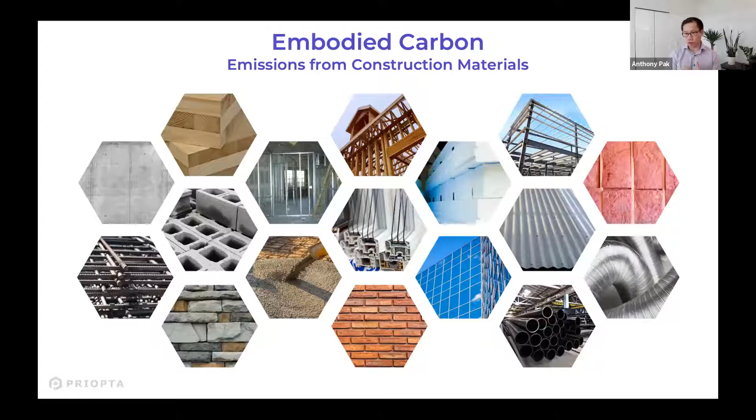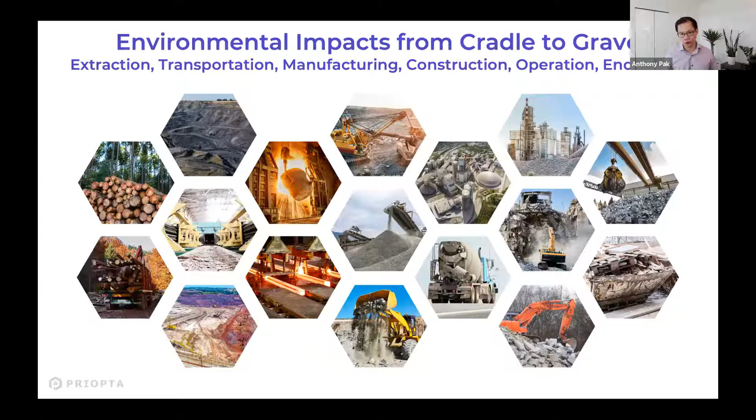So first off, why does embodied carbon matter? When we're talking about embodied carbon, we're referring to the emissions associated with construction materials. Think of all the materials that go into a building - concrete, steel, wood, glass. There's carbon emissions associated with that throughout all the life cycle stages - everything from extracting those resources, like mining and harvesting timber, to transportation of those materials, manufacturing and processing, all the way to construction, operation, and end of life. So if you think about the supply chain of all these materials throughout the whole lifespan of the materials and the building, what are the emissions associated with all those pieces? That's what we quantify using life cycle assessments.

Now, how significant is embodied carbon globally? This pie chart shows the global annual CO2 emissions. Currently, about 28% of global CO2 emissions is attributed to operational carbon - that's operating all the buildings on the planet right now, heating, cooling, operation. That's obviously a big chunk, and that's where we've historically had a lot of focus in the green building sector. However, there's a further 11% slice attributed to embodied carbon - that's associated with all the materials and all the new construction taking place each year, including major renovations.

Another way of slicing this up is looking at just some key materials used in our buildings - concrete, steel, and aluminum. Together they account for almost 23% of global CO2 emissions. Now, obviously the building sector doesn't use all the concrete, steel, and aluminum in the world - these materials are also used in infrastructure, in manufacturing cars or other products. But the reason I'm pointing this out is that as a building sector, we have the opportunity to transform some of these supply chains to create demand for low carbon concrete, low carbon steel, low carbon aluminum, and other materials. If those changes happen in the supply chain, it doesn't just affect the building sector - it can have a broader impact on infrastructure or other categories that use these materials. So we can have a big impact with our design decisions.

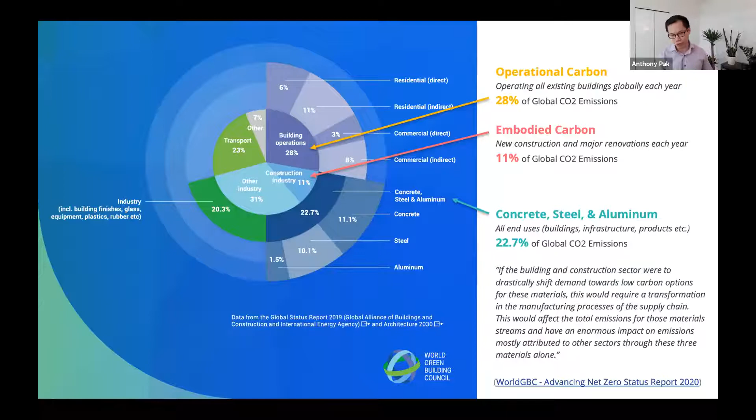What about new construction? If we look at how much new construction is projected to take place between now and 2050, over the next 30 years, and just look at that cohort of buildings built between now and 2050, the embodied carbon associated with that building stock accounts for almost half of the total new construction emissions, with the other half being operational carbon emissions. This is quite significant - half of the emissions of all new construction over the next 30 years is coming from embodied carbon, which we have typically ignored on projects. We don't even quantify it, calculate it, or try to reduce it.

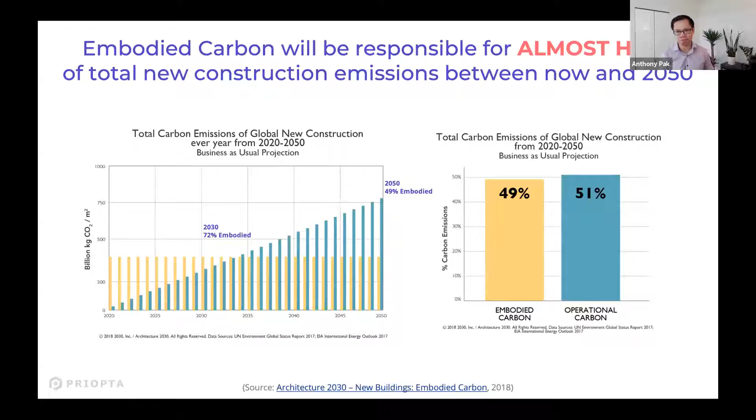That's equivalent to building an entire New York City every month for the next 40 years. Just let that sink in. Think about how much floor area there is in all the buildings in New York City - that's across all 5 boroughs, not just Manhattan. I think it's something like 5.8 billion square feet. That's how much we're building every month for 40 years. So that's a lot of buildings, that's a lot of materials.

Now, how does this map to our climate goals? To limit global warming to 1.5 degrees Celsius, according to the IPCC report, we needed to peak global emissions last year, which we actually did, in large part due to the COVID pandemic. Then we need to halve global emissions by 2030, and then get to 0 by 2050, and then go negative afterwards. So you probably heard recently Biden announced a 50% reduction target by 2030 - that's in line with this 1.5 degree scenario target.

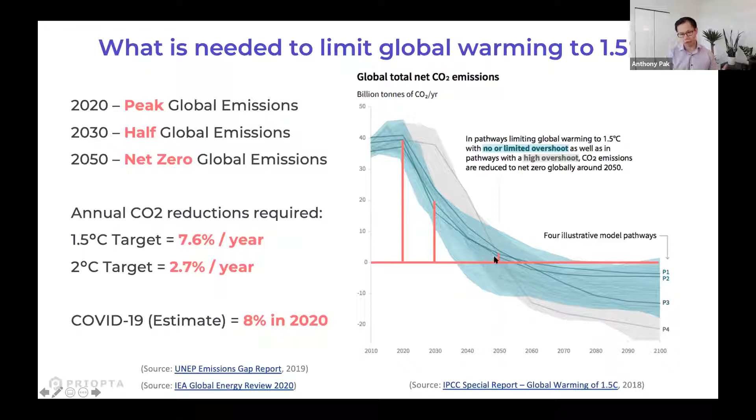So let's bring this down to the building level. How does this compare with operational carbon? The key metric I want to look at is kilogram of CO2 equivalent per meter squared of floor area. Excuse the meter squared - I know that's not the same as the imperial system, but a square foot is roughly a tenth of it, or roughly 10 square feet to a meter squared.

So this is an overview of, let's say, a hypothetical building. Let's say the building lasts for 60 years over its whole lifespan. Every year there's going to be some operational carbon emissions - that's heating and cooling the building. During the design phase we quantify that using energy modeling, and this is something we're all very familiar with. This is something that gets done in the design phase - we're trying to inform decisions to reduce operational carbon emissions.

But then there's also the embodied carbon. Upfront, before the building's even occupied, there's a big pulse of emissions. Most of the embodied carbon occurs before the building's occupied, because that's when all the materials get manufactured and produced - that's where most of the emissions are. But then we also account for things like replacements and maintenance throughout the lifespan of a building. So if any building components last, say, 15 or 20 years, but the building lasts 60 years, we account for those replacements. And then finally, end of life - if there's any emissions associated with deconstruction, demolition, or landfilling of those materials, we account for that as well.

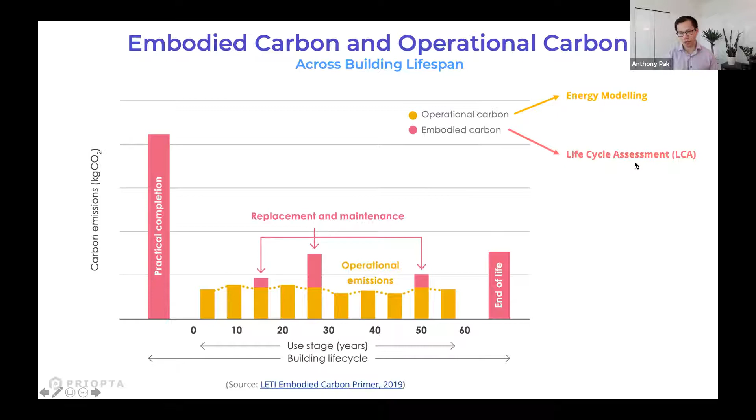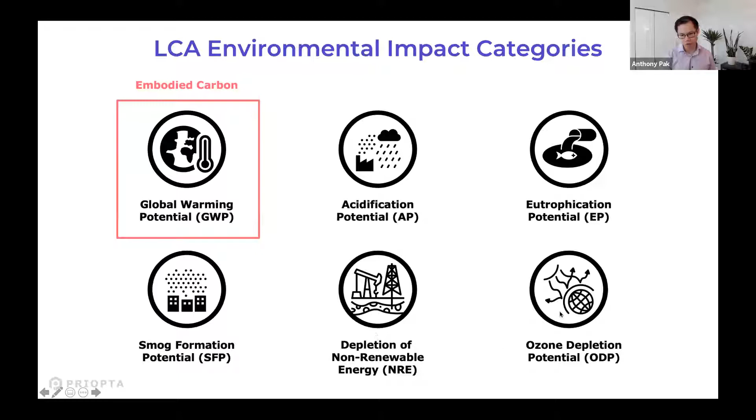And to do that, we use a life cycle assessment. You can think of LCA as analogous to energy modeling, to analyze both sides of this equation. Now, when we do a life cycle assessment, while most people talk about the carbon emissions or embodied carbon, this is actually only one of many environmental impact categories that we quantify. So when we do an LCA, we look at global warming potential, or GWP - that's what we refer to when we say embodied carbon. But then we also look at things like acidification potential, eutrophication potential, smog formation, depletion of non-renewable energy, and ozone depletion. So these are some other environmental impact categories that we look at.

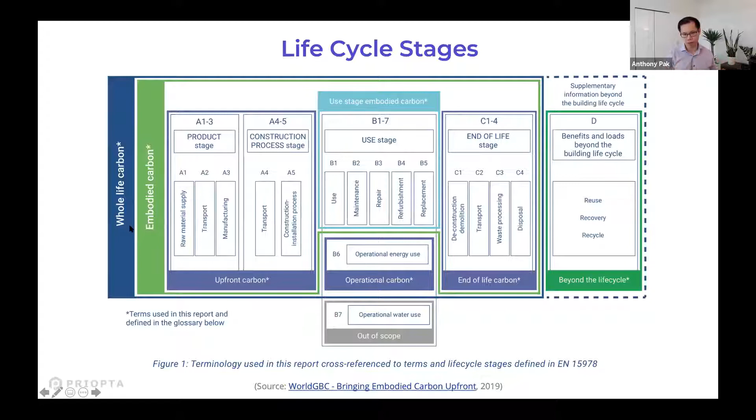Now, historically, the thinking has been that operational carbon emissions are far more significant than embodied carbon, so maybe it's okay to just ignore the embodied carbon. But what we're seeing is that over time, as we decarbonize our buildings, design more energy efficient buildings, and decarbonize our electricity sector so our grids are lower carbon, the operational carbon emissions drop. And as they drop, the embodied carbon becomes a bigger slice of a smaller pie, so to speak.

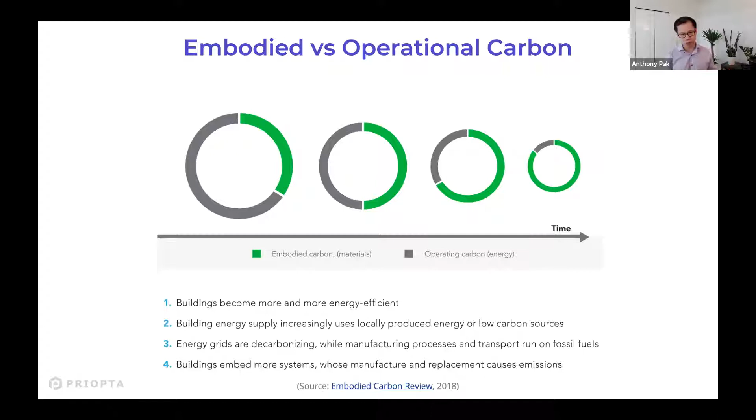And the reality is this equation changes drastically from region to region, from city to city, because those parameters can change quite a bit, even the electricity grid. So I'm from Vancouver, Canada, and in British Columbia we have fairly low operational carbon emissions. We've already designed fairly efficient buildings, and we have a very clean electricity sector. I won't get into the details, but this is something we have called the BC Energy Step Code. I'm just trying to create a frame of reference for operational carbon emissions versus embodied carbon emissions.

Broadly speaking, we actually measured some of the buildings, like 500 plus buildings, for the first time this year, so we have a benchmark report. Let's say a typical multi-unit residential building is around 20 kilograms of CO2 per meter squared per year, to operate, heat and cool it every year - around 20 or 21, offices around 15.

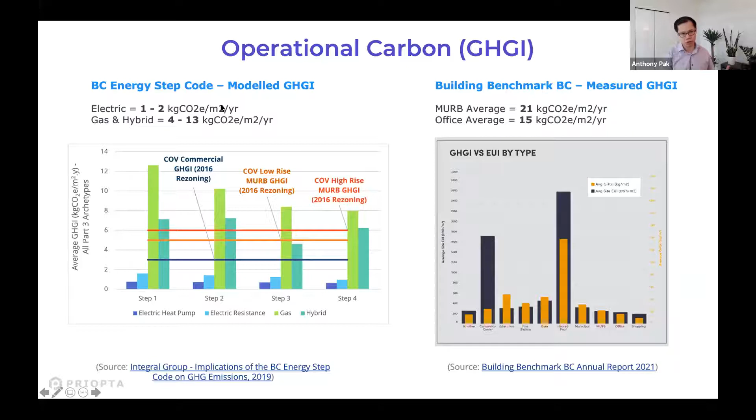However, if you're complying with our BC Energy Step Code, which is where our building code is going, as you get higher in the steps, you get more energy efficient. One of the key things for us in BC is that if we electrify our buildings, because we have a lot of hydroelectricity, our buildings get very low - they can get down to 1 to 2 kilograms of CO2 per meter square per year. At that scale, the operational carbon is so low, the embodied carbon can be quite significant.

Before I share about the embodied carbon, like the range of emissions you can expect, I want to touch on the electricity sector, because this can really affect your operational carbon emissions, especially if you use a lot of electricity in your building.

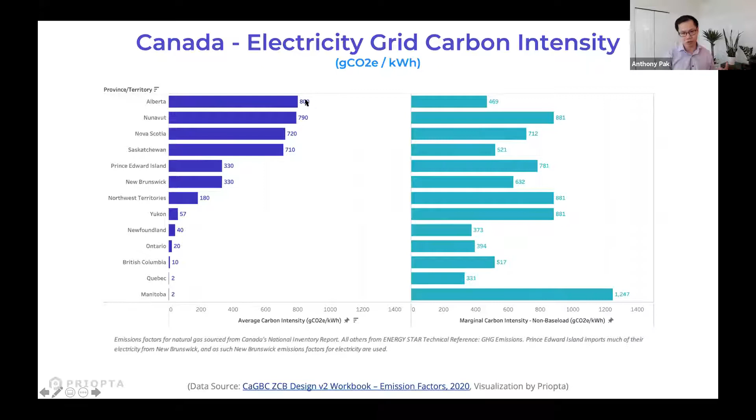Just to show you there's big variations: I mentioned in British Columbia we have a lot of hydroelectricity, so we're around 10 grams of CO2 equivalent per kilowatt hour, which is extremely low. Alberta, our neighboring province, and also where I'm from, has a lot of natural gas and coal in the electricity supply, so that's around 800 grams of CO2 equivalent per kilowatt of electricity. You can see there's huge differences there.

So this is just to calibrate, because this is going to affect your operational carbon emissions quite significantly. Oftentimes when we're talking about operational aspects of the building, we're more focused on energy metrics, like energy use intensity, kilowatt hour per meter squared. But that obscures what the actual carbon emission impact is. We're using energy as a proxy for actual greenhouse gas emissions, and when we look at greenhouse gas emissions, we need to actually think about the grid carbon intensity.

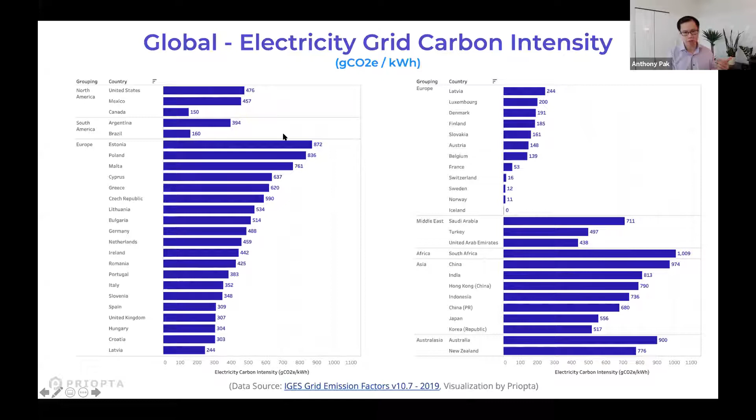This is just one further graph showing how it varies between different countries at a national level. Nationally, the average for the US is around 470. And you can see in Asia, China and whatnot, it's close to 1,000, right? So there's a lot of coal electricity there. You can see how it varies in different regions, different countries. Okay, that was a bit of a sidebar, talking about the electricity mix.

Now I want to get back into the embodied carbon metrics. We know on the operational side it can vary quite a bit, and on the embodied side it can also vary quite a bit. This was a study done by the Carbon Leadership Forum back in 2017. They looked at 1,000 life cycle assessment studies from around the world and compiled it, and you can see there's a big spread in the emissions.

It could be below 100 kilograms of CO2 per meter squared, all the way to 1,000, with many of the results in the 200 to 600 range, let's say. Similarly, One Click LCA, which is one of the software tools, developed their own benchmark as well for different building types like offices and apartments, and created a letter grade rating system.

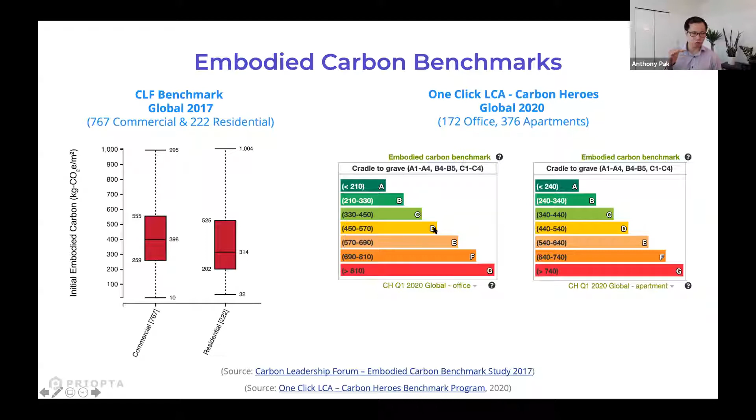For example, if it's below 210, they're considered really high performing, so that's a letter A. If it's above 800 kilograms of CO2 per meter squared, that's considered fairly high. So this gives you a sense, a range of emissions, an order of magnitude sense of scale. And so you need to combine these pictures, right?

For example, this is a hypothetical picture, but if your embodied carbon is like 400 upfront, and then annually you have a certain amount of emissions. One thing that oftentimes doesn't get factored in is we tend to assume that the operational carbon emissions is going to be the same the first year as like year 60 in the building lifespan.

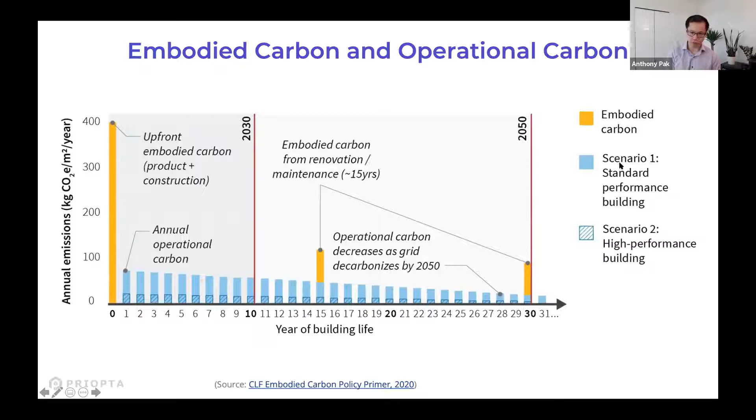But if we take seriously that we're going to reduce the carbon intensity of our electricity grids — there's some proposals in the US for getting to zero emissions by 2035, or different states or regions have their own plans for the electricity sector — as that goes down, then the electrified buildings will also be decreasing their emissions over time as well. So that's just a sidebar point. But the operational carbon emissions can vary a lot; there's a difference between standard performance buildings versus really high performing buildings, which can be much lower.

And just to reiterate the point, this is kind of the extreme example. I'm sure in Nashville, the picture is going to look quite different.

I would imagine the operational carbon intensity is much higher. But for example, in BC, if we get electrified buildings down to 1.1 kilogram of CO2 per meter squared, the embodied carbon for a 5-story office building I'm currently working on is like 558 kilograms of CO2 per meter squared. Even over 60 years of analysis, 90% of the total carbon of the building is associated with embodied carbon.

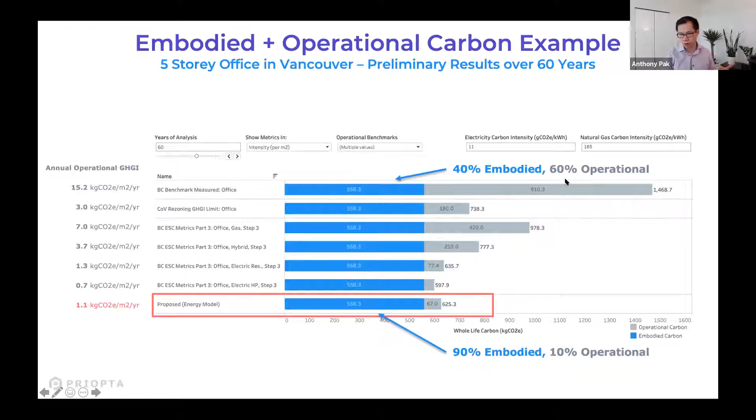But obviously, if you have much higher operational carbon emissions, let's compare it against a typical office in Vancouver or in BC, then it's about 40% embodied carbon over 60 years. So that's just a range of results to show.

So now I'm going to move over to policies and standards. All around the world, there are voluntary green building standards and also regulation coming into effect that address embodied carbon in some way. These logos highlight some of the different programs that address embodied carbon in some way, and this was done in 2018. There's been a lot of recent efforts that have taken place.

Broadly speaking, I see policies typically operating at 2 scales. One is at the material or product level, looking at environmental product declarations, which I'll get into a bit later. I actually see that a lot in the US. For example, the Buy Clean California policy, similar proposals in Washington, or the Marin County Low Carbon Concrete Code. These are trying to develop regulation that's focusing specifically at the individual material level.

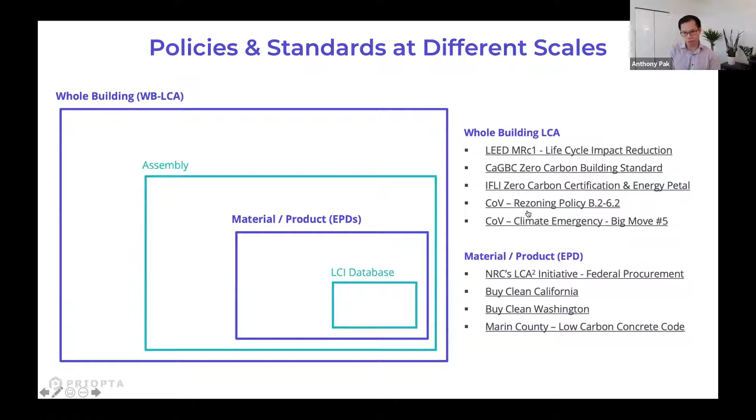And then we also have policies addressing it at a whole building level - not just individual materials, but on a whole building basis, comparing to a baseline to see what percentage reduction in embodied carbon can be achieved. For example, LEED with the USGBC, under the material resource credit, you can get up to 5 points for reducing embodied carbon. The CaGBC, the Canadian Green Building Council, also has a zero carbon building standard. The International Living Future Institute with their Living Building Challenge, and also through their zero carbon certification, they also have some requirements for reductions. And in Vancouver, we have probably some of the most ambitious policy efforts taking place. I'll get into that as well.

So I mentioned environmental product declarations. If you're not familiar, that's essentially like a food nutrition label, but for building products. Similar to nutrition labels telling us the health impacts per serving size of the food, with a product EPD - in this case, concrete - we can say per meter cubed of concrete, what is the global warming potential, the acidification potential, all these impacts. It gives us a sense of the environmental impacts associated with individual products. Essentially, these are life cycle assessments done on individual products - for that manufacturer, for this particular brand of insulation, we go through the whole supply chain, do a life cycle assessment, and quantify what those emissions are.

There's a third-party verified process to develop these environmental product declarations. They follow ISO standards and avoid greenwashing, because oftentimes you hear a lot of marketing claims by different manufacturers, but EPDs actually allow for a better basis for understanding how relative environmental performance compares between different products. These EPDs can be at the industry average level - for example, a US or North American average for wood or for concrete for different mixes - or they could be at the manufacturer or plant or product specific level, down to a particular brand of insulation from a certain manufacturer.

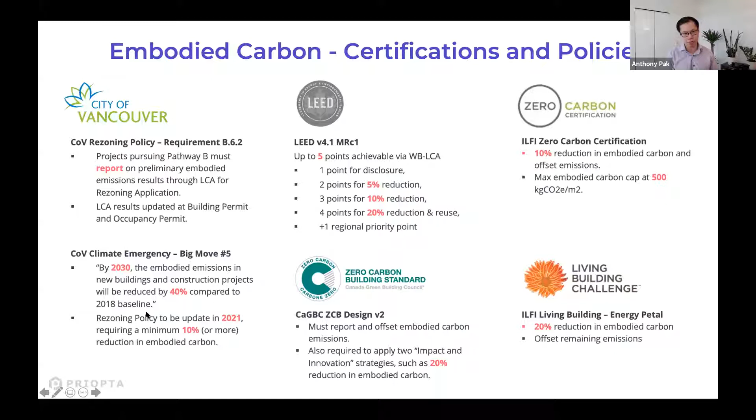Okay, so that's policies. Now we'll get into software tools.

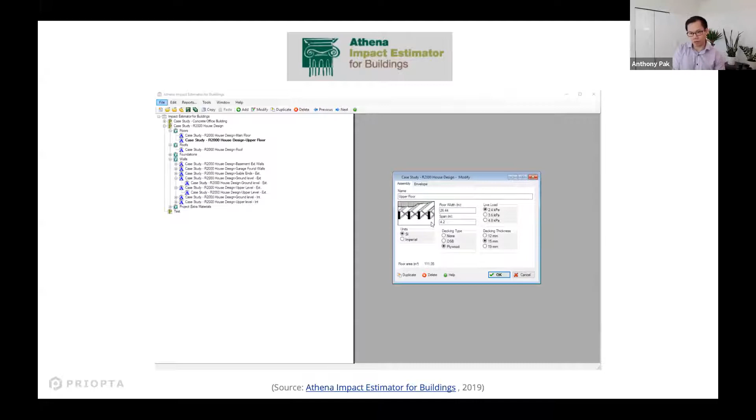There's a tool called the Athena Impact Estimator for buildings. This is a free software tool, a Windows application, and it's quite easy to use. Essentially you can just do takeoffs from your drawings and build up these assemblies through this program. So for your floor, you can build up the assemblies, what materials are in there, etc. It's especially useful in the early design phase when you don't have a lot of detailed quantity takeoffs, and you can make assumptions as you build up assemblies.

However, it doesn't have a Revit integration, so for larger, more complex projects, it can be more difficult to keep your LCA model updated and accurately model all the materials going into your building.

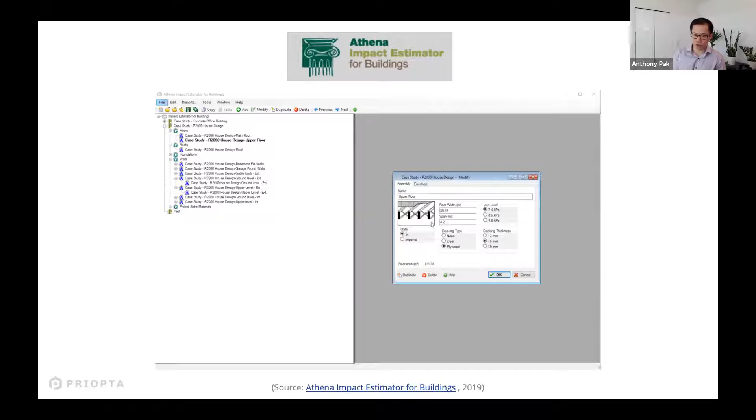Next up, there's Tally. Tally is a paid tool, I think it's like $700 US per year or something like that. This is a Revit plugin, and it only exists as a Revit plugin. So obviously it's great that it works within Revit—you can map all the materials you've defined inside your Revit model to their database of materials, and do your analysis that way. It's quite good, especially for more detailed, complex projects.

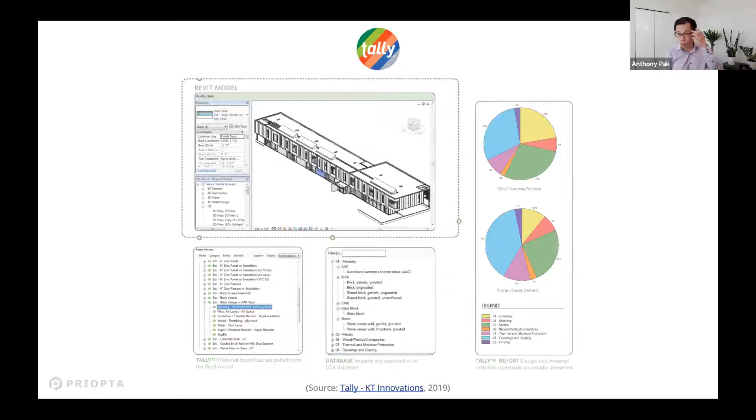However, because it's purely a Revit-only tool, it can be challenging to do design comparisons, or even in earlier stages, if you don't have a Revit model, then you can't do an LCA. If you want to model different wall assemblies, you'd have to actually model each alternative in Revit before you can map it to the database. So it can be a bit more challenging to compare different options, but it's a great tool.

And then finally, there's One Click LCA.

It's probably the most expensive of the tools. There's different tiers of license, but I pay for the expert license, which is about 3,000 US per year. This tool has a much bigger database of background data and environmental product declarations, and it works with Revit and a lot of different design software. There are integrations for many tools, and it can be used in early design as well as late stage design.

I actually did a comparison for the National Research Council in Canada on these three different tools. I won't get into the specifics in this presentation, but I can send out the slides afterwards. There are links at the bottom of all the slides with references, so you can explore this further later if you want to see how these tools compare. This is just based on my own assessment, but I will get into some of the data points.

Both Athena and Tally mostly use industry average data. However, they draw on different types of databases—actually, all three of them draw on different databases. So one key point is that when you're doing an analysis, you want to stick to the same software throughout the design process so that your results are consistent and the background data and assumptions are consistent.

Both these tools mostly have industry average data, so they don't have as much manufacturer specific data, whereas One Click LCA has a bit of both as well—they have manufacturer specific data.

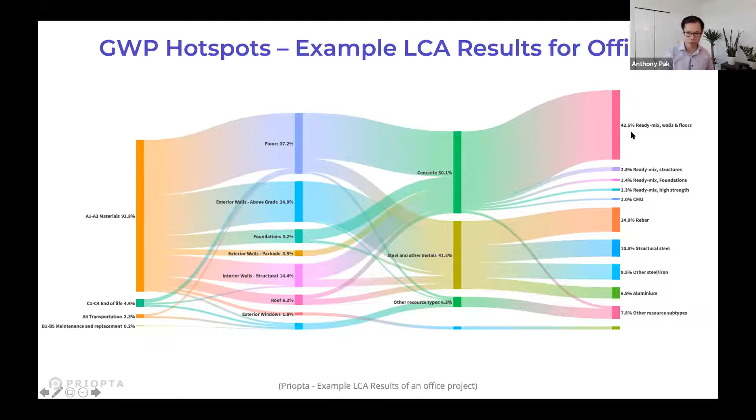The point of doing a life cycle assessment is to figure out where the hotspots are—the aspects of your building that generate the most emissions—and whether there's a way to reduce those emissions. For example, this is an example project we did for an office, showing the breakdown in emissions between the floors, exterior walls, foundations, interior walls, etc., and also the breakdown across different materials—how much of the total emissions are associated with the rebar, the structural steel, or the ready mix.

This is just mentioning it—I think using Revit models is definitely really helpful. However, it has its own challenges sometimes. Sometimes there's information missing in the Revit model, or you have to clean it up. So it can be more accurate, but there are a lot of quirks to work out to make sure you're actually getting the right quantity estimates.

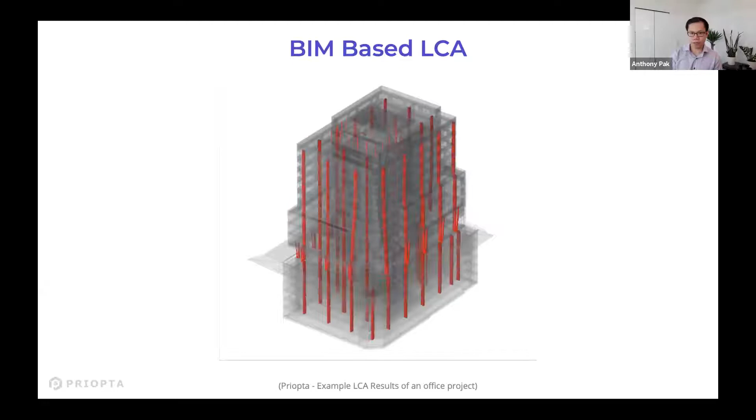Now, design strategies for reducing embodied carbon.

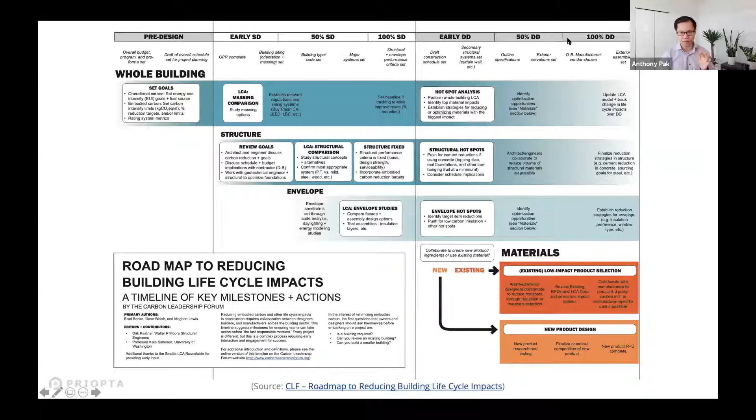First off, before we get into design strategies, this is a great resource for looking at how to integrate embodied carbon considerations throughout the design process, from early schematic design to design development, all the way to construction documents, bidding, and construction. You can click on this link to see the bigger version of this chart. I highly recommend you look at that so you get a sense of the type of design decisions you make at each phase.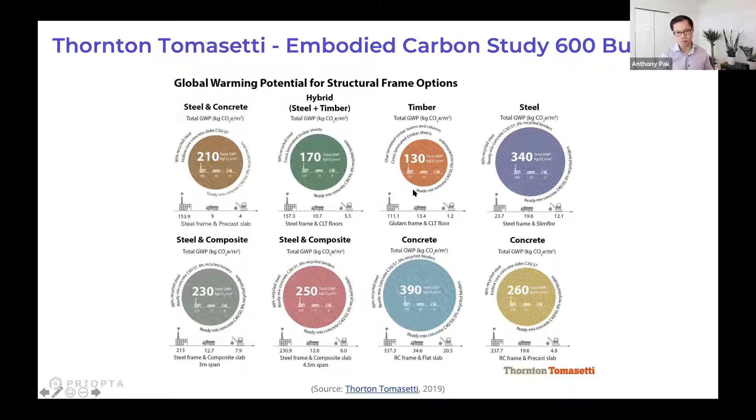Concrete buildings tend to be higher. However, there's big variability there too. What you do with the concrete mixes, what type of steel you use, that can change your results quite a bit. So you definitely need to do the analysis, but this is just to give you a high level overview.

So as I mentioned, we're going to go through all these key materials, starting with concrete. The thing you want to pay attention to is the cement. Cement makes up about 10 to 12% of the concrete mix, however, it makes up 80 to 90% of the actual emissions associated with the concrete. So essentially anything that you can do to reduce the amount of cement content in your building can have a huge impact on the overall embodied carbon of your concrete mix.

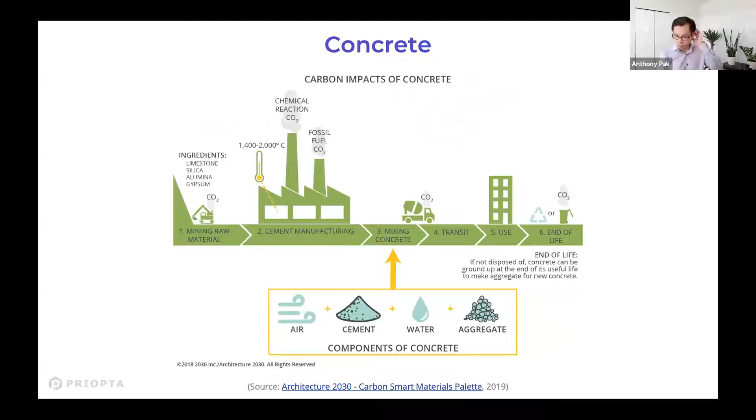So what are some of those strategies? You can use Portland limestone cement, also known as GUL, or general use limestone. This is in contrast to regular Portland cement. The difference is that you're basically adding a bit more limestone into your concrete mix and reducing the cement content. That's kind of low-hanging fruit. I don't know if this is standard practice in Nashville, but definitely ask your suppliers for this. That can lead to about a 10% reduction just on the concrete mix level.

And then from there, you can also increase supplementary cementitious materials, things like fly ash or slag. Those things will generally correlate with reducing the cement content in the concrete mix. These are just based on my own estimates, but roughly, from some of the numbers I've seen, every 10% increase in the SCM content leads to about a 7% reduction in embodied carbon of the concrete mix. Again, these are high level numbers, but the key point is you want to optimize it by building element. As you have higher SCM content, it can affect your curing times, and that's one of the considerations.

So for example, your foundation, you may be able to go much higher on the fly ash or slag content versus your above grade floor slabs. For each element of the building that uses concrete, you want to really optimize that and work with your structural engineer, work with your ready mix supplier on that.

Also, if you can use performance-based specifications and avoid prescriptive requirements. Sometimes we see prescriptive requirements like this is the minimum cement content that we need, or the maximum water to cement ratio, or the maximum SCM content. Those are the types of things that can limit what a ready mix supplier can do in order to reduce emissions of the concrete mixes that they deliver. Rather, you want to have performance-based metrics like strength, durability, cure time, et cetera, and let them figure out the optimal mix.

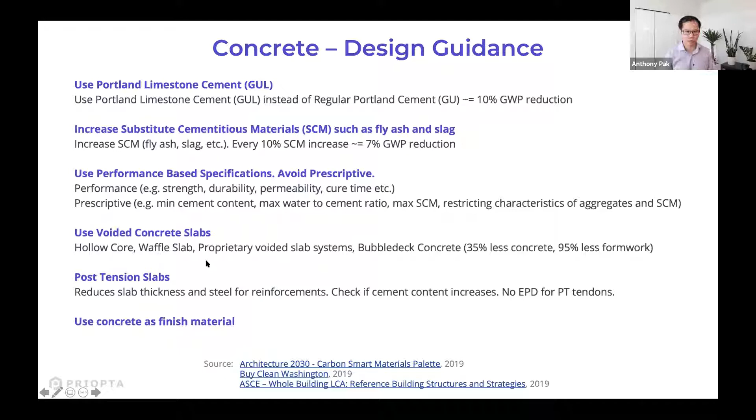Those are kind of key strategies for concrete. Just to give you a sense of how much reductions you can do for concrete, this is a Canadian example. We're looking at the Canadian Ready Mix Concrete Association's industry average EPD.

And if you look at just 35 MPa concrete, comparing it to the benchmark mix, the average mix, if you use Portland limestone cement, that's the GUL, and you can get up to 35% or higher SCM content, you can bring it down to about 35 to 40% reduction. I've also seen some of the manufacturer-specific EPDs lately that go much further than that as well. So a lot of reductions can take place on a per meter cubed of concrete level. Really focus on the concrete mixes.

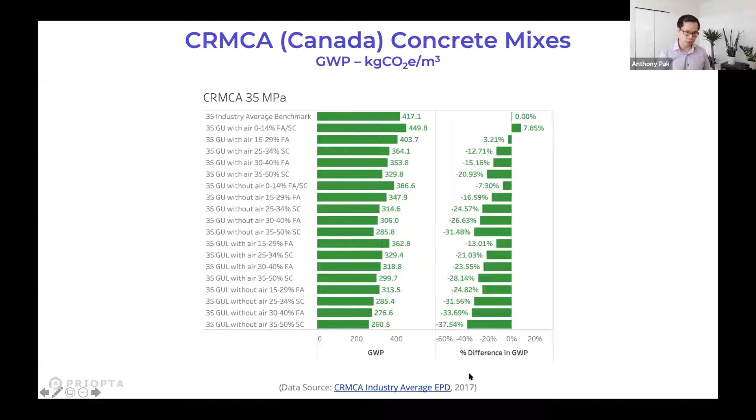Next up is steel. There's two broad ways of making steel: one is basic oxygen furnace, and then the other is electric arc furnace. Generally speaking, electric arc furnace steel is much lower emissions, about half, maybe even down to a fifth, depending on how it's produced. Basic oxygen furnace is how we make most of the steel in the world, about 70% of global steel production, and it uses much less recycled content. It's mostly actually virgin iron ore, but it can be 25%, maybe much less.

Whereas electric arc furnace is mostly recycled scrap steel, for example, up to typically 97%, very high recycled content. And because it's an electricity-driven process, electric arc furnace, if you think back to the electricity grid mix point that I made earlier, it matters where the steel is produced.

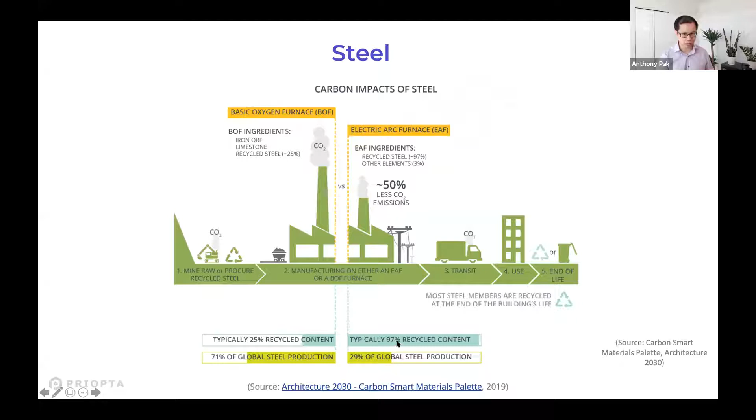If it's produced in a state that has very low carbon grid electricity, that will affect the embodied carbon of the steel as well. So generally speaking, try to specify steel that uses more electric arc furnace where possible. Although that's not a solution at the global scale, because we don't have enough recycled steel to satisfy global demand. We still need to make primary steel through basic oxygen furnace, and we need to figure out ways of decarbonizing that as well. But broadly speaking, it's important to think through where you source the steel, what the emissions of that steel are, and how do you reduce the steel quantities on your project.

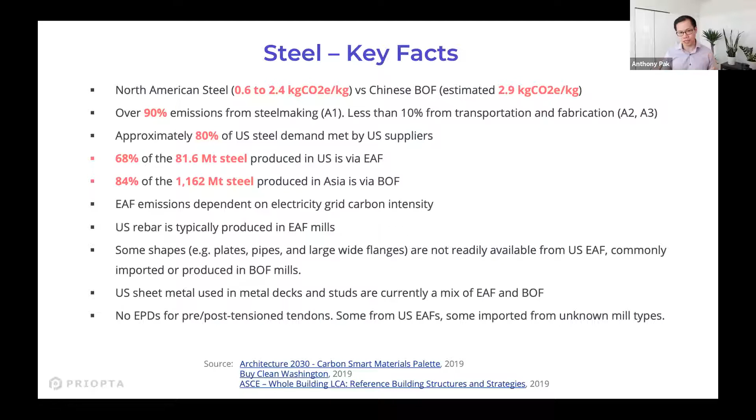Some of these points I'm bringing up talk a lot about material substitutions or how different materials or manufacturers compare, but there's also a lot to be said around how do you actually use less materials. So work with your structural engineers on what's the optimal column grid spacing or whatnot. There's a lot of strategies they can do to help reduce the material quantities used on projects as well.

Next up is wood. As I mentioned, generally wood is quite low embodied carbon when we do our LCA studies. One thing I want to highlight is that when you're looking at case studies that compare a wood building versus a concrete building, and they say it's a certain percentage reduction, one thing to keep in mind, or a question to ask, is what is the assumption around biogenic carbon? How are they handling biogenic carbon? For wood and other biomass-based materials, there's a question of how biogenic carbon is modeled.

For example, sometimes people make the assumption that this log of wood, this wood stud, or the CLT panel, has this much carbon content stored in this piece of wood. So they estimate what the carbon content is, translate that into CO2, multiply it by -1, and say this is actually stored. So this is negative, we're going to give some negative credit for storage. That can obviously change your results quite a bit compared to the conservative assumption of not including storage benefits as well.

And then furthermore, there's a whole series of questions on how do we account for, for example, forestry related emissions, which aren't included in our EPDs for wood. What happens to the soil carbon? What happens when you cut down the tree? What if the tree were to keep growing? Do you account for that, the relative carbon differences there?

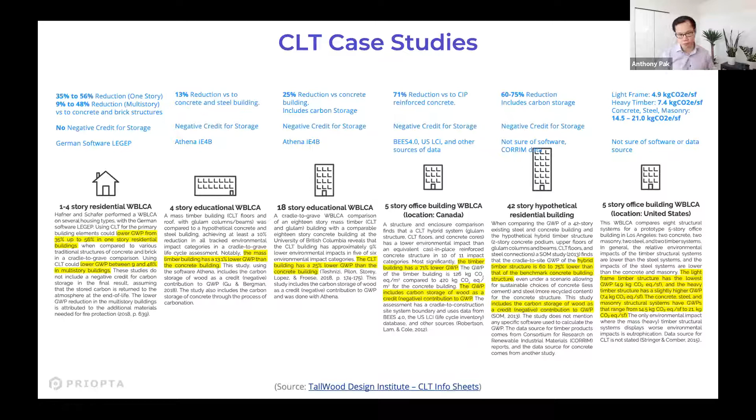But yes, it matters, you definitely want to source your wood sustainably. So look at sustainably sourced certified wood, especially FSC wood. A lot of people think that they have higher standards, or they may be lower carbon. Okay, next up, aluminum.

Aluminum requires a lot of energy. It uses almost 10 times as much electricity than steel to produce. So it really matters where this aluminum is produced, and that it uses a low carbon electricity mix. Interestingly, in Canada we're the 4th largest aluminum producer in the world, and I think we're the lowest carbon producer because we have a lot of clean electricity. Most of our aluminum is produced in British Columbia and in Quebec, which have a lot of hydroelectricity. Also, we use the latest generation of production technology, so it's more efficient, and that can influence things quite a bit.

Aluminum is highly recycled, but it's important to note that similar to steel, we don't have enough recycled aluminum to satisfy global demand. So it still really matters how we make the aluminum. Recycled aluminum uses much less energy and is much lower emissions, but as I said, there's not enough recycled aluminum. But on a whole building basis, generally speaking, aluminum is one of the highest impact materials. So you really want to use it sparingly and use it with reuse in mind.

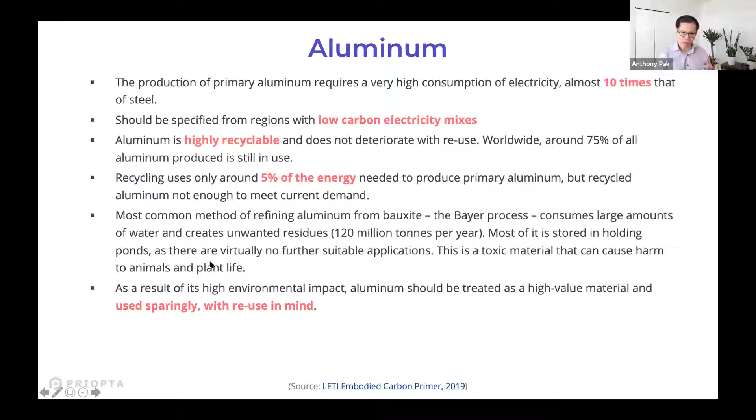Talking about glass. There's obviously a lot of glass used in our buildings. It has decent impact - not a particularly high impact material, but due to the quantities we use, it still adds up.

But I think the key thing to really look at is the framing options. For your window frames, what are you using? That can really affect the overall embodied carbon of your facade. A wood frame window is much lower embodied carbon than an aluminum frame window. If you look at curtain wall assemblies with aluminum mullions, it's the aluminum that's really driving up the emissions. That's something to keep in mind.

However, whenever you're talking about anything that affects the envelope of a building or the operational carbon emission considerations, you need to weigh the benefits and not just optimize for embodied carbon. For example, double pane windows versus triple pane windows - obviously adding another pane of glass is higher impact from the embodied standpoint, but maybe it leads to more reductions on the operational side. I'm definitely an advocate of looking across the whole picture and seeing what makes sense.

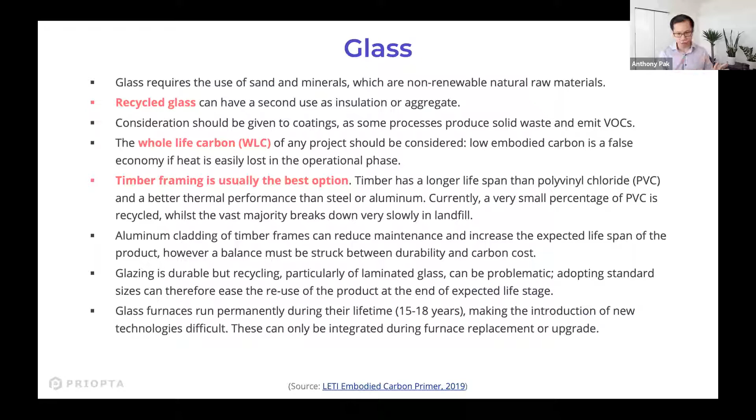The key takeaway is that many whole building LCA software tools, including the three I mentioned earlier, significantly underestimate these emissions by an order of 10x to 25x. This did not show up in many of our LCA studies because they significantly underestimate these emissions. That is mainly due to blowing agents.

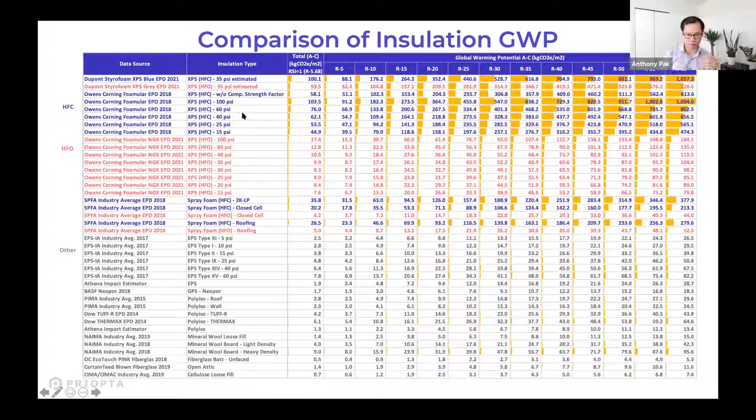The reason why I started looking at a lot of this stuff was due to a book called Drawdown, which looked at the top solutions for global warming. What surprised me and a lot of people was that the number one solution, in terms of mitigation potential on a global basis, was refrigerant management. Higher than things you'd normally think, like wind turbines, solar, or even plant-based diets.

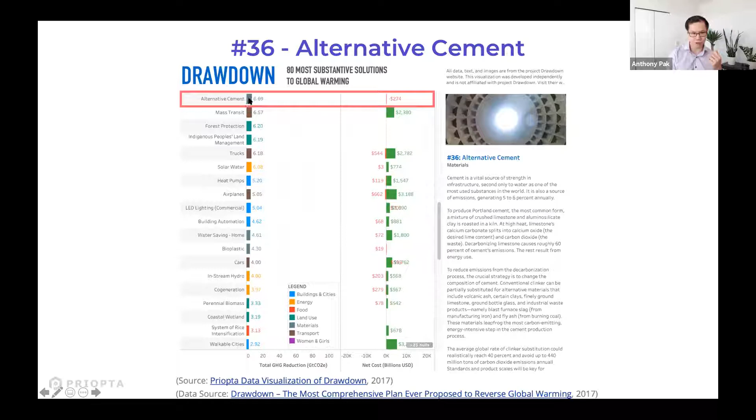If you compare that to cement, which is something we talk a lot about in the embodied carbon world, it has much lower mitigation potential—it's number 36 on the list compared to refrigerant management. That made me think, how come we don't hear that much talk about it in the building sector? I think now we're starting to hear a bit more, but a couple of years ago, not really at all.

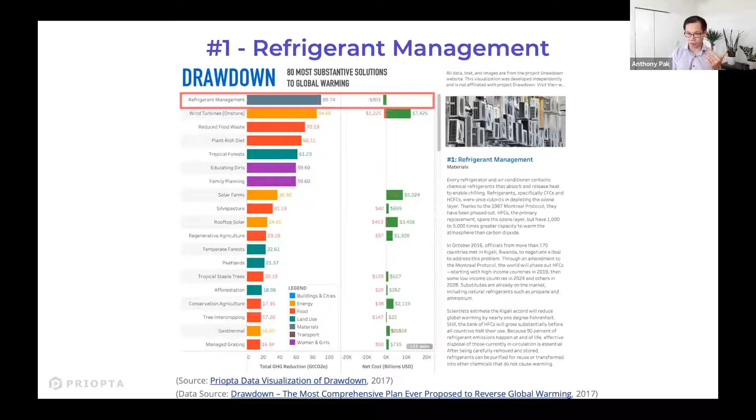This is getting a little technical, but just something to keep in mind. I mentioned earlier, if you hear about kilograms of CO2 equivalent, that little 'e' at the end of CO2 means we actually have many different greenhouse gases that affect the climate in different ways. CO2 is the main one people talk about, but methane is also very significant, though it has a different profile—it stays in the atmosphere for a different period of time.

When we're looking at these global warming numbers, we actually have to look at it over a time horizon. This is unstated—most people don't know this, but almost all CO2 emission statistics you see, whether at the national level, the IPCC level, or in LCA studies and EPDs, all assume a 100-year time horizon. So you may have heard that methane is 25 or 28 times more impactful than CO2—that's over a 100-year time horizon.

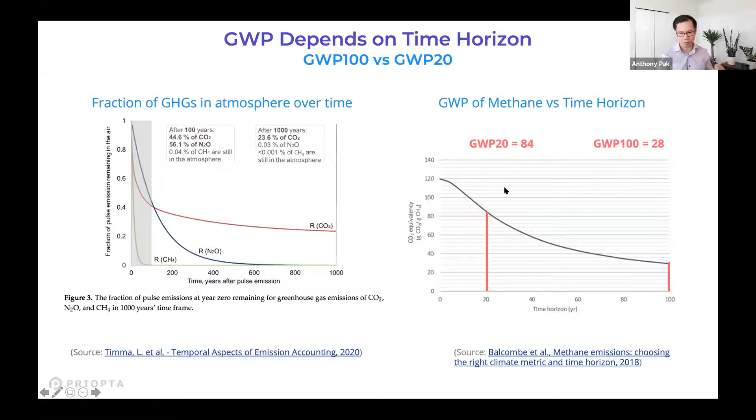But over a 20-year time horizon, it's actually 3 times higher—like 84 times more impactful. This is true not just for methane but also for refrigerants. Many refrigerants have very short atmospheric lifespans, under 20 years. So you could argue a 20-year time horizon is more appropriate, or it's just a different lens to look at it. In that case, those refrigerants are 2 to 3 times higher impact than anything you see published, because of the time horizon assumption.

So these are very significant from a climate change perspective. I mentioned R-134a, the blowing agent commonly used in a lot of XPS insulation—very high impact, 1,400 times more impactful than CO2 over a 100-year time horizon, versus 3,800 times more impactful over the shorter horizon. So refrigerants are a big deal.

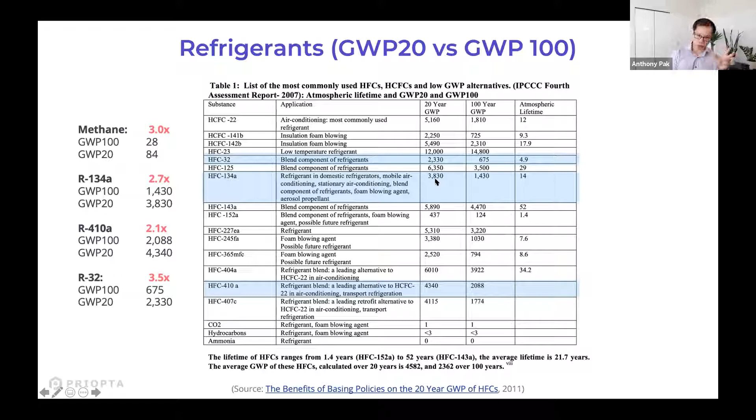It's used in our insulation as blowing agents, and obviously in our mechanical systems, which is where it's mostly used—so this is also in the operational carbon domain. We tend to look at the operational carbon savings from using refrigerant systems, for example variable refrigerant flow, which has a lot of refrigerant charge in that system. But we don't account for leaks—we often don't even measure them, or have no idea how much leakage takes place. But if it does leak, it can actually be quite significant in terms of emissions.

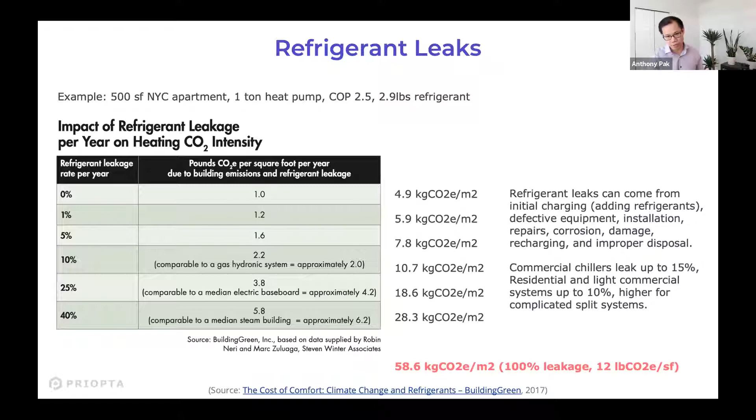So that's something that oftentimes doesn't get addressed. Also, in our LCA studies, we typically just look at the structure and the envelope right now. Those are kind of the main categories we look at. But we oftentimes don't quantify the embodied carbon associated with the mechanical, electrical, and plumbing systems. Think of all the ductwork, pipes, plumbing, air handling units, et cetera. The materials that go into it, all the steel, the copper, et cetera, we don't quantify that.

So there's different ranges of estimates. In this case, it's from the Carbon Leadership Forum, they did a study. They estimated between 40 to 75 kilograms of CO2 per meter squared. I've seen some studies from Integral Group that have gone up to like 2 to 300 kilograms of CO2 per meter squared, depending on the facility. So it can get quite high.

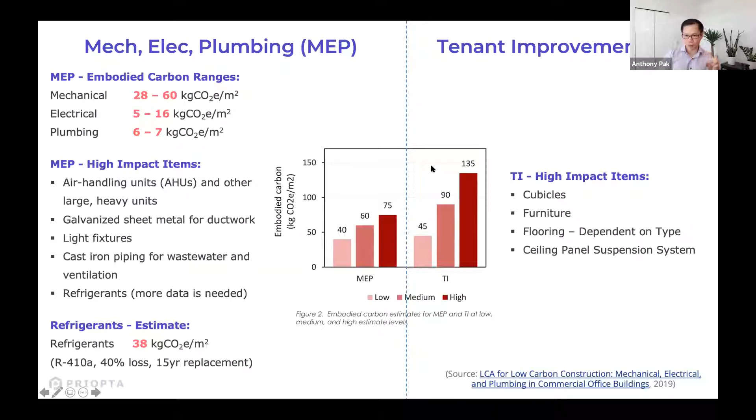Same thing with tenant improvements as well. So we're talking about interiors, finishes, furniture, cubicles. Those things oftentimes don't get addressed too, and they can be quite high. But the thing to keep in mind about these factors is these are the one-time emissions, but they actually get replaced at a certain cadence, right? So they have a certain service lifespan.

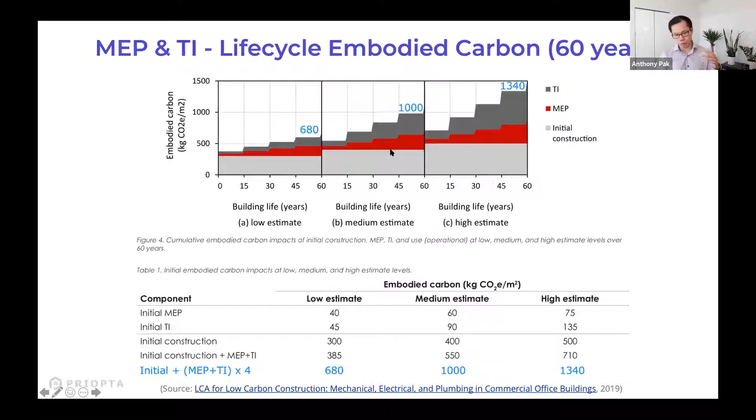So this is a simplified example, but let's say, for example, in a medium estimate, the structure and envelope is 400 kilograms of CO2 per meter squared. So that's kind of the gray. And then we assume that the MEP system and the tenant improvements happen every 15 years. Those can add up to a point where that actually even eclipses the initial embodied carbon that we quantify using our LCAs, just of the structure and the envelope. So all that to say, we need to think about the lifespan of these things as well in this.

And just to wrap up, another metric to think through is not just about material substitutions or how to use materials more efficiently. It's also worth considering, what if we actually look not just at kilogram of CO2 equivalent per meter squared of floor area, but rather we look per occupant. We see that floor area per capita is actually increasing in almost all regions. So in the US, I think it's averaging about 700 square feet per person. So it's quite high, highest in the world. So can you make more efficient use of space?

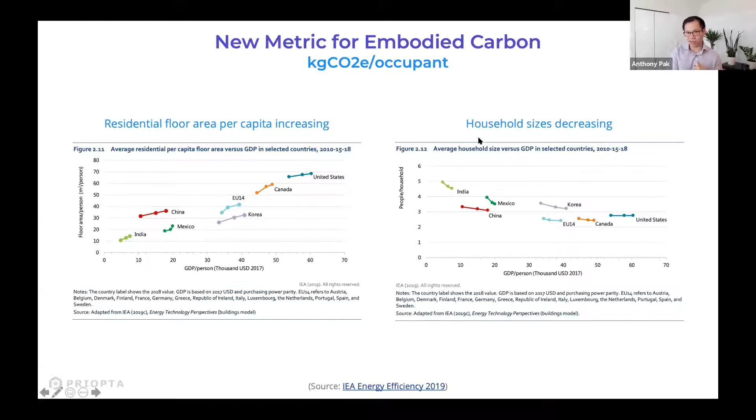So for the architects out there, that's something to keep in mind, it's not just about material substitutions. Can you make better use of the space, more efficient use of the space? And then also household sizes are decreasing across the world as well.

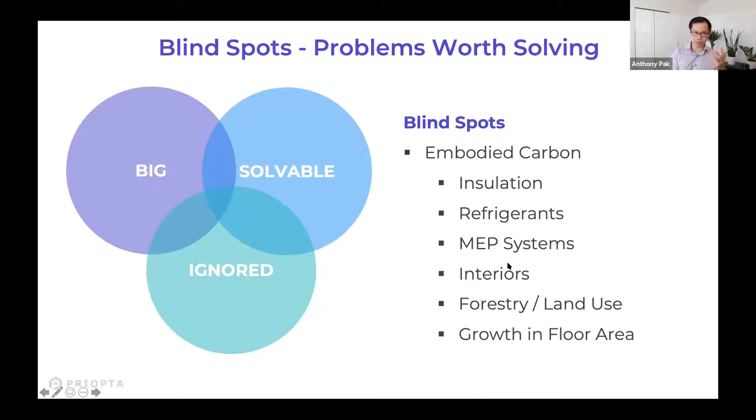Broadly speaking, I really advocate for looking for the blind spots. So embodied carbon, I mentioned, is a blind spot, or I refer to it as a blind spot. It's something that was ignored. It's a big problem, it's solvable. But also within embodied carbon, there's many blind spots, like the HFC blowing agents in insulation, refrigerant leaks, MEP systems, interiors, forestry impacts, growth in floor area. These are all blind spots. So I encourage you to kind of seek that out for yourself as well.